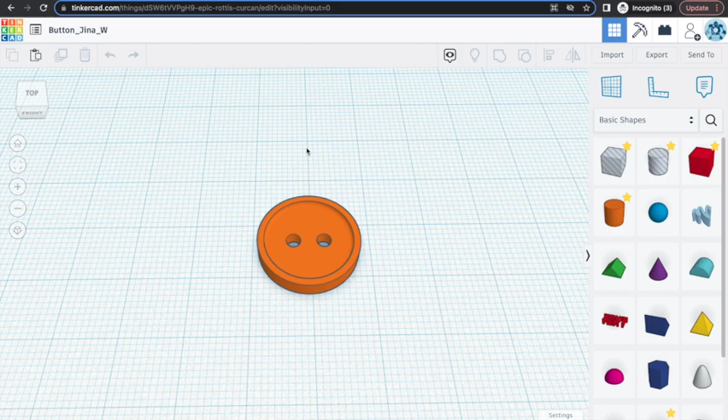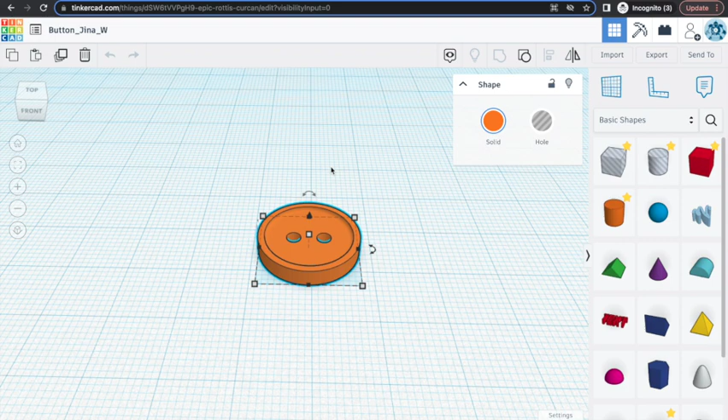This one is my own design. Tinkercad has one in the Learning Center portion of their website, but I wanted to add a little more detail to let you know that even though this button is very small, only 3 millimeters, there is room for a lot of detail and things you can put on there, as long as you understand how that concept works. So let's get started working on this button in Tinkercad.

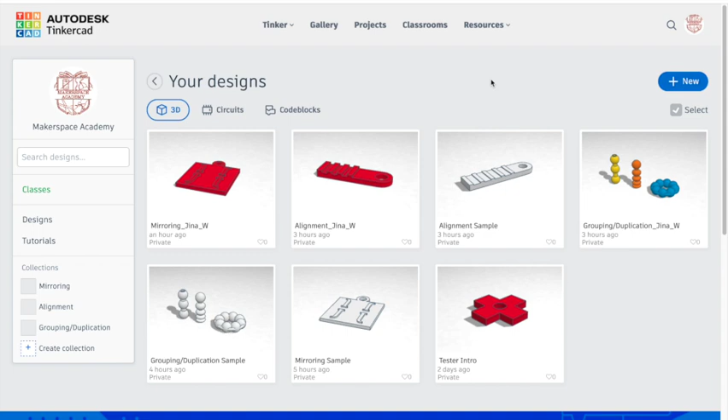Let's get started on your button project. First things first, you will see me working in the Makerspace Academy Tinkercad account. At this point, you should have moved over to your own account, so that you'll be the only one who has access to it. Keep that in mind here — you will be seeing me working in this account, but you will be working in your own personal account.

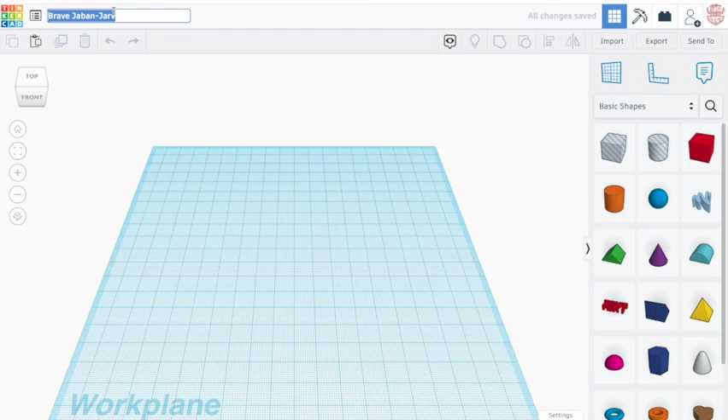Upper corner, new, 3D design. As always, first things first, rename this — you're going to name it button underscore your first name underscore W. Enter, or just click off. All right, let's get started on building this button up.

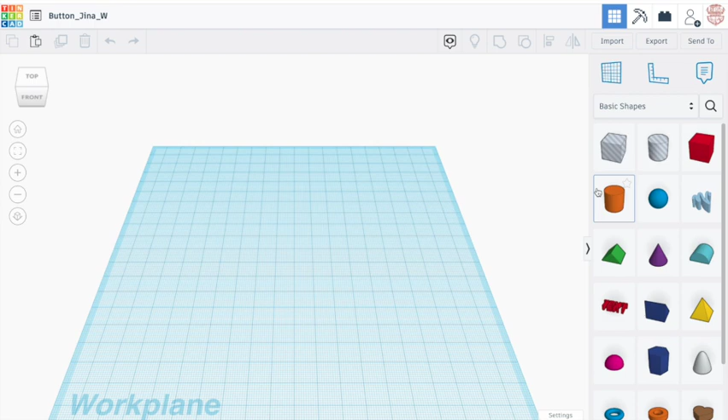We're first going to grab a cylinder. Just something to note, this button is made entirely of cylinders, from the details to the holes to the button itself. So our first button — let's get the dimensions for this first button piece.

We have our basic button that is 20 by 20 by 20, and we're going to resize that. Hold shift and press at the same time on your mouse, then start to drag it, and you can do 17 by 17, and that does it automatically. Or you can manually press on it — 17, tab, 17 — either way. And your height is going to be at 3.

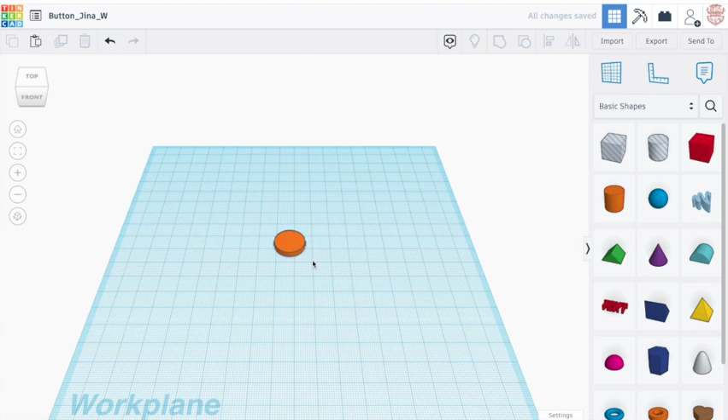Now we're going to start tweaking some of these other settings here. Let's zoom in a little bit to our button. You might notice there are small lines there. When you make a shape in Tinkercad, it's actually building up this shape with sides. So you have this cylinder — if you remember your shapes from school, there are the sides, and if you spread it out, there's a rectangle, and then a circle and a circle.

Those circle ends stay the same, and then there's your rectangle, but it's actually broken up into several smaller rectangles. I hope I didn't lose anyone — point being, there are sides to your cylinder. You can change that, because when you print it, it's actually going to go 20 times, since that's how many sides you have by default. You can increase the amount of sides you have, and you can almost barely see them now, so that makes a smoother shape. Some shapes have access to that, others don't, and you'll learn that as you continue to work.

Then we're going to do our bevel. When I first designed this button, I probably eyeballed it, so if these dimensions seem kind of weird, that's why. We're going to do 0.42, enter, and now you can see how the bevel is starting to work a little bit. The bevel means it's adding an extra little edge to your design — you can see it's got a slight slant right there, and that'll smooth out your button just a little bit.

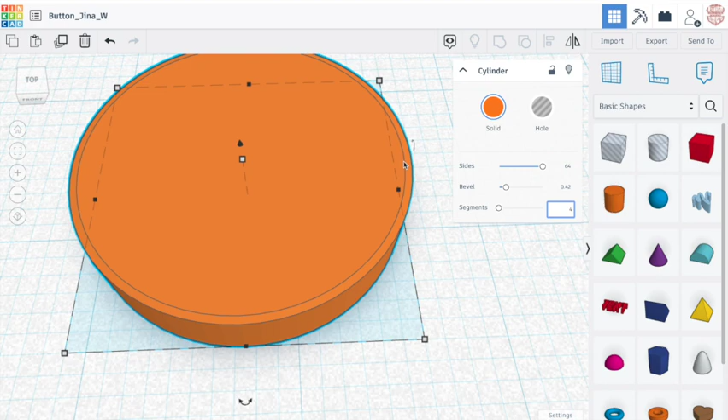And then we're going to add segments. The segments means it's actually going to add a series of lines in your bevel, and that will make it smoother.

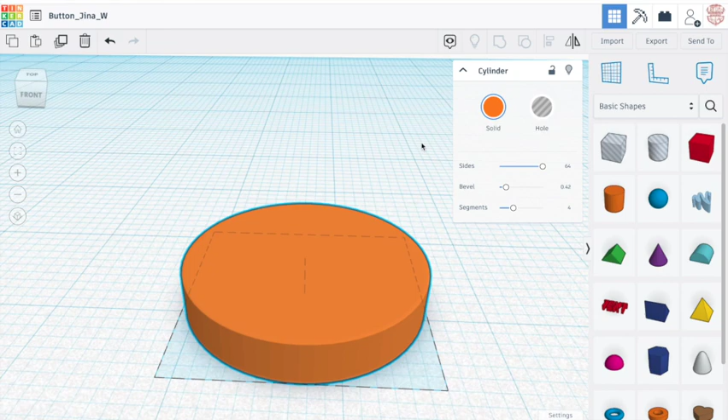So we're going to zoom in. You can actually see there's kind of these little demarcations right here. That's 4 of them, and that means that your bevel is a little bit smoother. It's a small, minor detail, and it might not even be affected by 3D printing, but I like to

know it's there, and this will get you in the habit of understanding how that detail works. So that bevel affects the top and underside of your cylinder. But now your base is done.

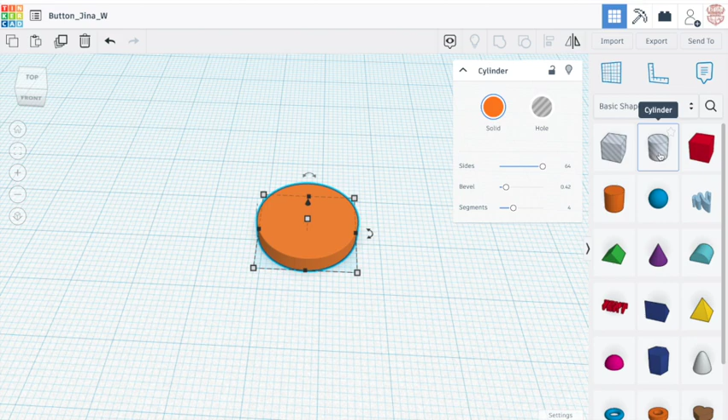So our next piece is going to be the holes. We're going to add another cylinder, and we're going to go straight to the hole setting this time. I'm using Shift and my right mouse button to kind of move this in place all at once. Then we're going to work on resizing this cylinder.

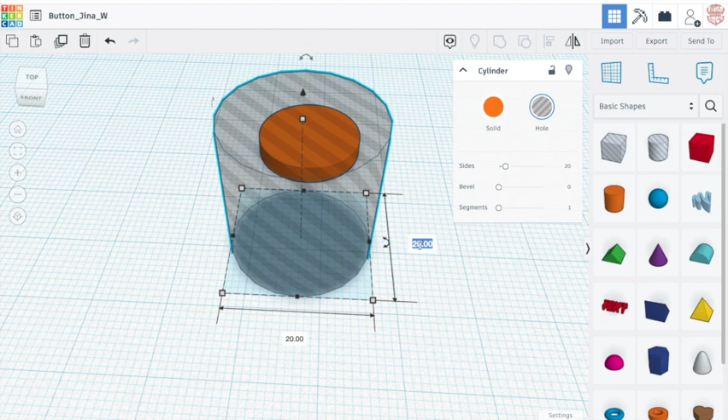Click this right here, and we're going to manually input 2.55, then tab, 2.55. And now you have this one here.

This one matters a little less whether you have the sides or not, so we're not going to change anything, and that'll be okay. I've moved this in front just so I can be a little more centered, so I don't have to shift and move again.

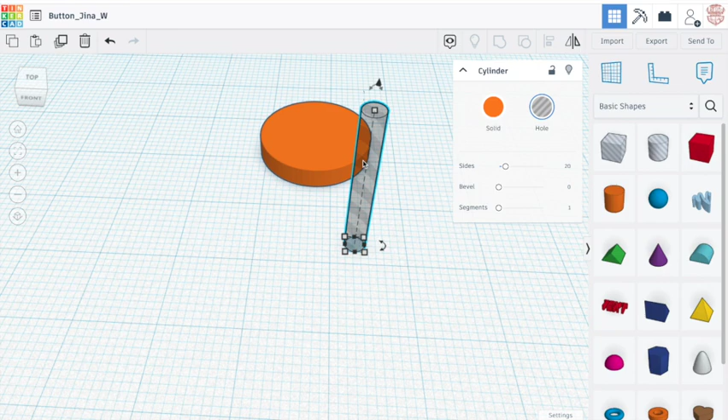We're going to duplicate this, Command D or Control D, Shift, and we're going to move it over. I moved it over a little, that's about -5. We're going to manually input -5.1, and that is going to be the distance that matches my original design.

And we're going to group this together, and those are the dimensions that I want.

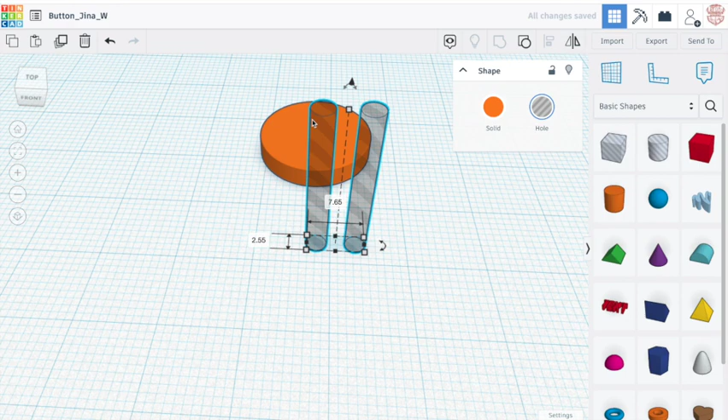Okay, so why are we grouping this? Well, that means you don't have to manually move each cylinder by itself and then align them and then redistance them and do it all over again. If you group it together, you can group holes.

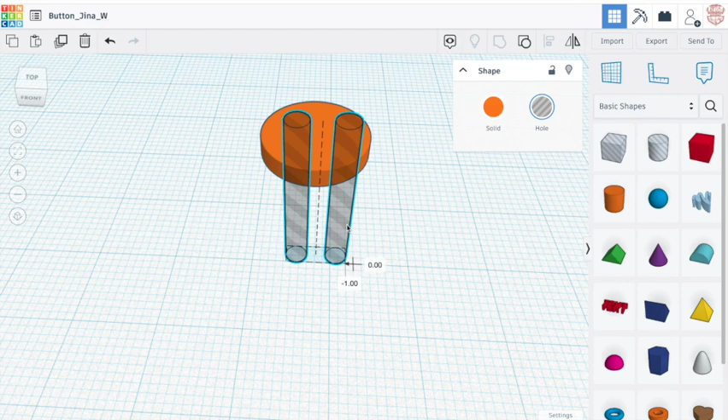Holes will only go away once you've grouped it with the solid. So you can group holes as much as you want, put on whatever you want, until you're ready to say goodbye to them. And so you can move these like so.

Now, since they have odd dimensions like 2.55, and your snap grid in the lower right is at 1 millimeter, it's not going to just center itself whenever you move it.

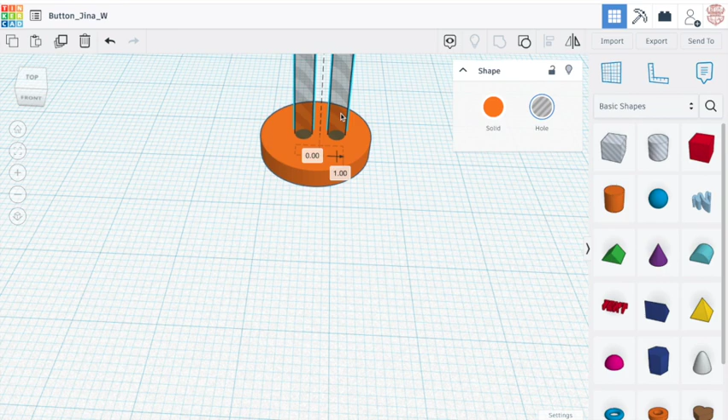So you have to use the Align tool, highlight both, and you see that you've done this right because you have 2 objects. That's the 2 cylinders grouped together into one, plus your base, and you're going to align it in the centers.

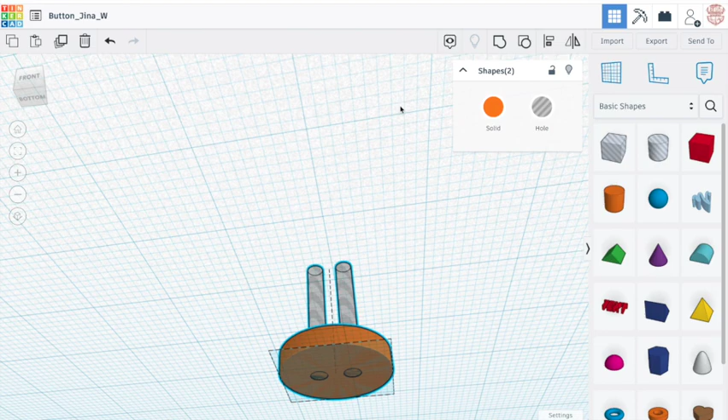And its underside, on the side is down. In case you think you've done anything off, you can always just press D one more time. Make sure that when you press D, you separate it

like so, separate each item, your holes versus your base. Highlight both and group them together.

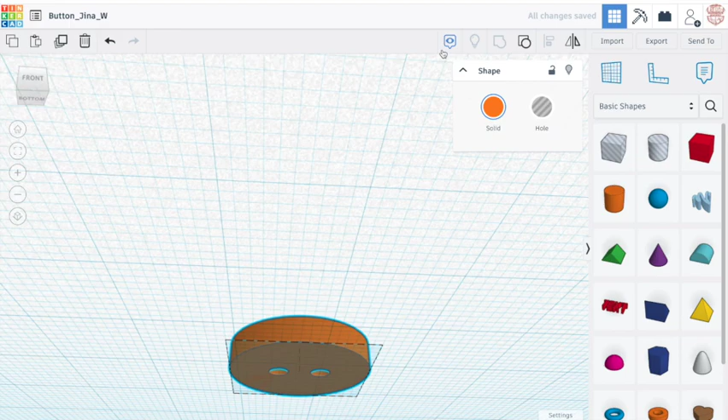Okay, now you have a basic button, but we want to add a little bit more detail to this. So we are going to add another cylinder.

And we're just going to pop that down like so, and we're going to resize this. You can do the Shift-hold-and-resize method so it does it both at once, or you can manually put the information in. This is going to be 17 by 17.

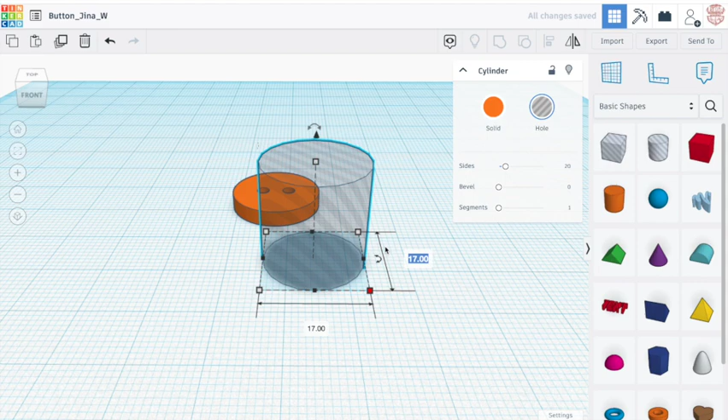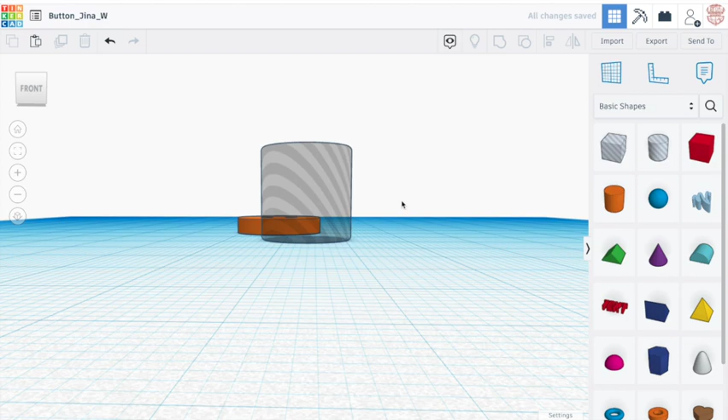And we're going to increase the sides, max those out, a bevel of 0.78, and segments of 4. So you can see this one has got a bit more of a curve to the edges here, and it's a little more pronounced.

So we're going to increase the height of this, and we're going to use that top arrow right here and highlight it in red.

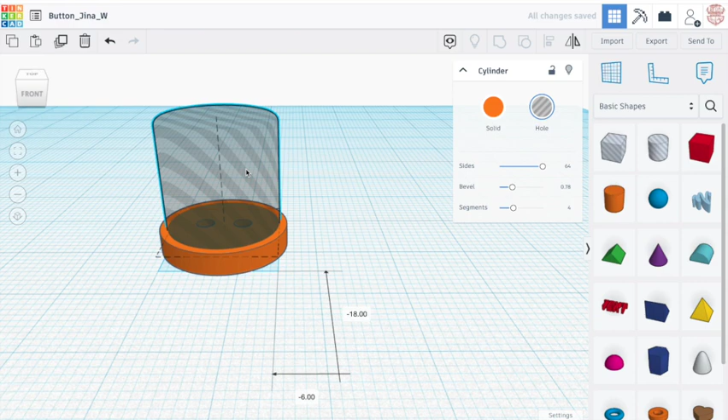And even if you manually move it, double check your align and make sure that these gray boxes are lined up. If they're not, click on them now and realign them. Highlight both pieces—oh, sorry, I forgot to mention the cylinder was moved up by 2 millimeters. Let me go back and show you that.

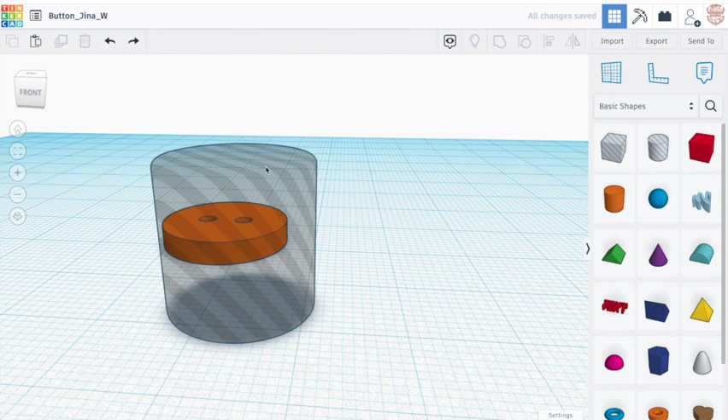So, arrow, move it up to 2. If for whatever reason it's not doing that, you can manually input 2. Move this over, double check centering, and group.

And your button's done, that's it. We will talk about exporting in the future, and again, this will be printed off.

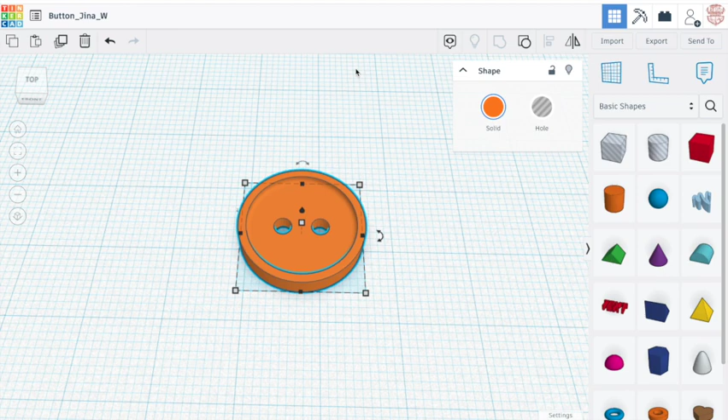So you have completed your button, and we can now move on to the next design, which is the ornament. It's a little bit more complicated, but as you work it through and I walk you through it, hopefully it should get a little bit easier.